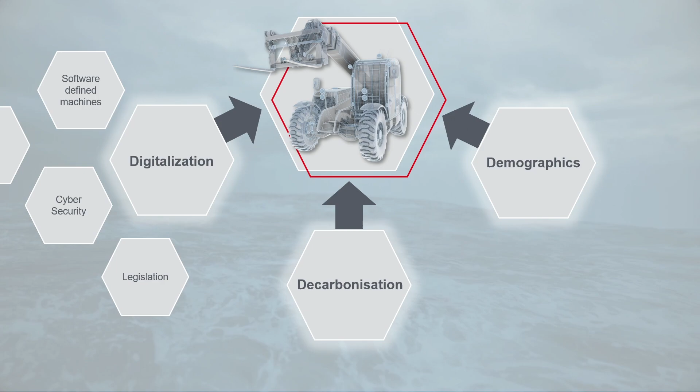Let's take a step back and look at the technical, ecological, and social trends that determine the requirements of your machines. We can identify 3 megatrends: digitalization, decarbonization, and demographics. A wide range of trends and challenges can be identified around these megatrends. A megatrend such as digitalization influences countless trends, from software-defined machines to legislation, generating new challenges.

One example is cybersecurity. The megatrend of decarbonization is obviously shaping technological change and represents a major transformation in the mobile machinery industry. Finally, the megatrend of demographic change, which is related to the development of new machines, and on the other hand, it's a motivation, for example, for mobile automation.

After this introduction, I want to start with the first topic of today, efficiency. I want to start with a question: Do you know the load spectrum of your machine? I know that's a difficult question because there are so many ways your machine can be used. There are so many influences, starting from the driver, and ending with the question of the working task of your machine. But if you can say yes, great, because that has laid the groundwork for my second question.

Do you know which losses occur in your machine? We will see later where these questions bring us.

I want to start with the multi-level approach for energy-efficient hydraulics. On the first level, the component and design level, we have different solutions, for example, parts-in-body solutions, flow-optimized cartridge valves, and pumps with high efficiency. This solution will help to improve the efficiency, but it will not help you to systematically prevent losses in your machine.

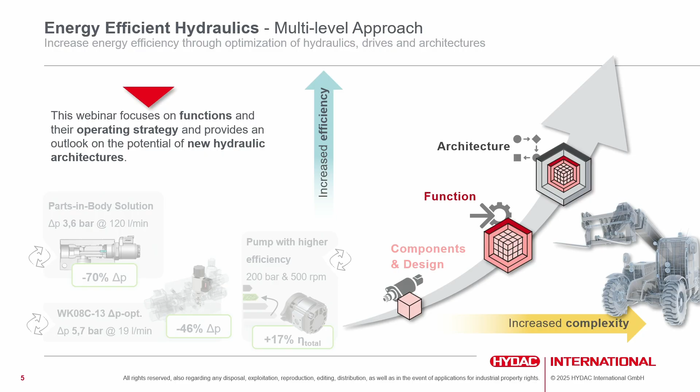Systematic avoidance of losses can be achieved at the functional or system architecture level of your hydraulic system. The greatest potential can be found in new hydraulic architectures, but they also represent the biggest change in your machines and go hand in hand with an increased complexity of your machine. This webinar focuses on functions and the operating strategy and gives an outlook to new hydraulic architectures.

Mobile working machines are characterized by a wide range of load collectives, depending on the machine, its application, and even the driver. Here are a few examples: on the one hand, the crawler excavator, which is more or less a stationary application; and on the other hand, the dumper, which is a driving machine with a high time share of driving and low time share of working hydraulic functions. In between, applications like the wheel loader or the telehandler.

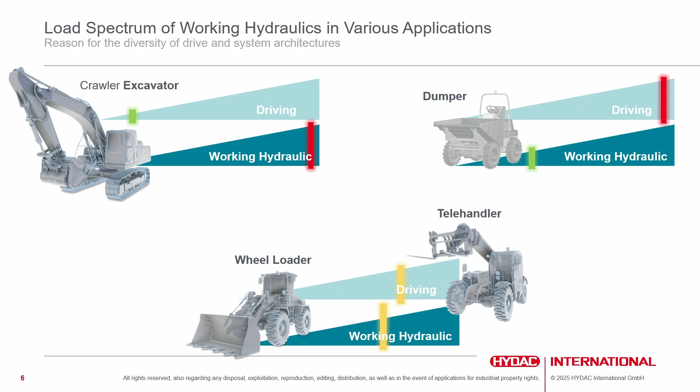Looking at the machines and their use, one might get the idea that both have comparable load spectrums. However, if we look a little bit deeper in the literature, we can find load spectrums for the working hydraulic function of these machines. And now you can see that the working hydraulic, or the load spectrum for the working hydraulic, looks totally different.

One example is the standby operation, which is much higher for the telehandler than for the wheel loader. The difference is also clear in terms of time share in the peak power and nominal power. This shows that the telehandler is used as a transport machine, while the wheel loader is used more for a rehandling operation on a construction site.

The conclusion of this slide is that there is no one-size-fits-all solution.

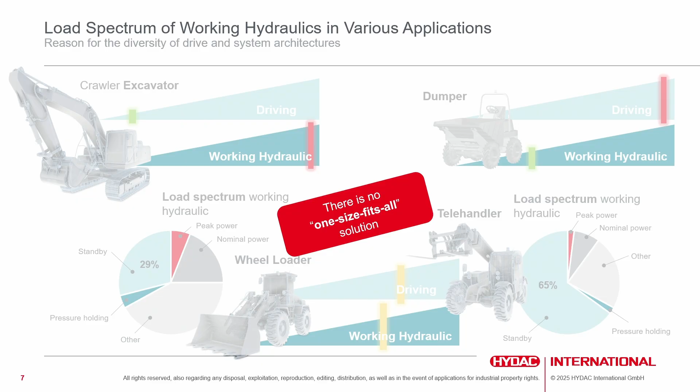Now we get a little bit deeper into the hydraulic system and try to understand which losses occur in your system. But we start with the good news for you: if you are thinking about electrification and replacing the combustion engine, you will increase the efficiency of your machine due to the bad efficiency of a combustion engine, which is equal to or lower than 40%.

On the other hand, the electric drive has an efficiency of 90% at a wide working range. So is this the answer to the question of how we can increase the efficiency of our machine? That's it? In my opinion, no - there's still a need for further energy savings on your machine to do the same job as before.

That brings us to the question: where do the losses in the hydraulic system occur? The following exemplary qualitative illustration of a Sankey diagram helps to explain this.

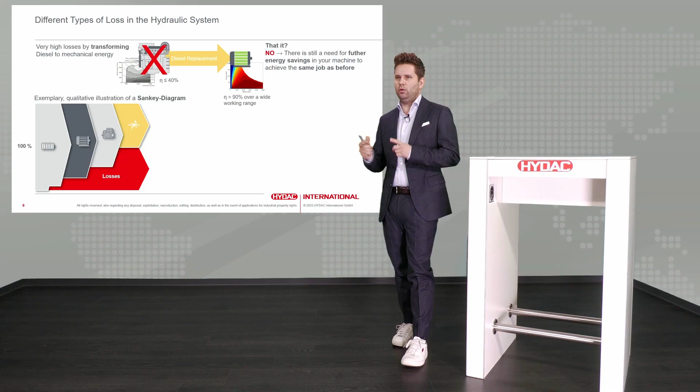The input energy, the 100%, is shown on the far left. At the end, the hydraulic output power of the main control valve, short MCV, is the power required for the job. This power is independent of efficiency and depends only on the machine and its working task.

Between output power and input power, there are losses: throttling losses, and transforming losses, which occur by transforming electric power into hydraulic power. Throttling losses depend on operation strategy, load collective, parallel movements of different hydraulic consumers, pilot oil supply, etc. Transforming losses depend on operation strategy of the electrohydraulic supply unit, the load collective of your machine as well, and the efficiency of the different components, meaning pumps, motors, inverters and so on.

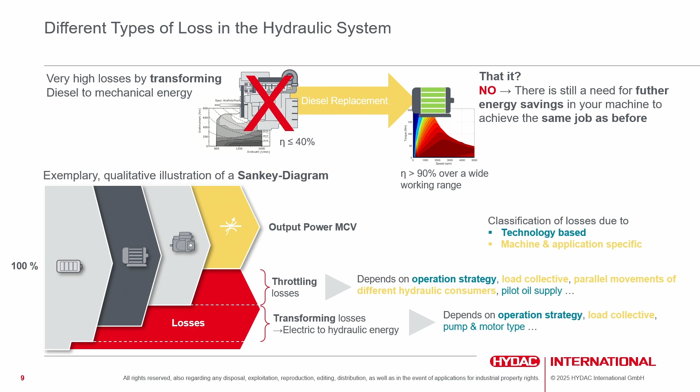Some of these can be influenced by technology, for example the operation strategy. You choose an operation strategy for your machine, for example a constant flow system or a flow on demand system. Some are machine and application specific and depend on the load spectrum. For example, do you have parallel movements in your machine? It really depends on which machine is doing which job.

For me, the key to increasing efficiency in your hydraulic system is always to avoid throttling losses. There are two types of throttling losses. The first: throttling losses due to the pump delivering too much flow, meaning more flow than the hydraulic actuators or different functions of your machine need. Second: throttling losses due to parallel movement of different functions in a single pump system.

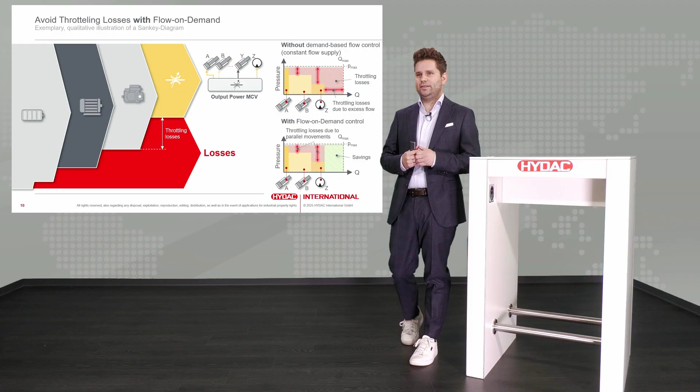Flow on demand is the first step to reduce throttling losses in your system, specifically the first type of throttling losses due to the operation strategy of your machine.

These diagrams show the efficiency of a constant flow system. These efficiency maps take into account the efficiency of inverter, motor, pump, and so on. So it's really related to input electric energy on the DC bus and the output power which is used at the MCV. The red area is the area of high efficiency and the blue area is the area of low efficiency. We compare a constant flow system and a flow on demand system with a state-of-the-art load sensing pump.

But first we look at the constant flow system. It's a fixed displacement pump at a fixed speed, meaning the flow is independent of the flow demand—the pump always delivers the same amount of flow. On the other hand, we can see the variable displacement pump. The input speed of the pump is also constant, and we are changing the output flow of the pump by changing the swivel angle of the pump. That means the pump only delivers the amount of flow which is needed by the different functions of your machine.

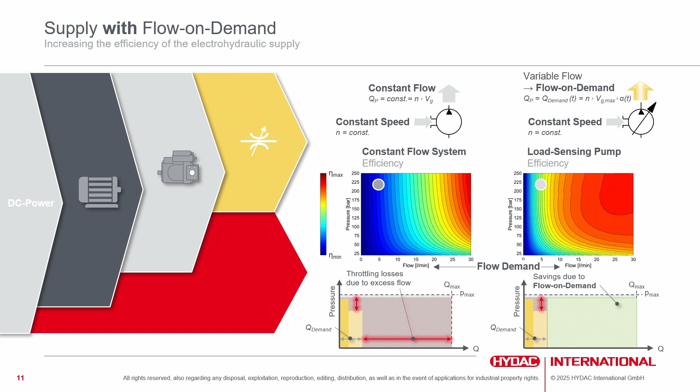On the right side, for the variable displacement pump, we can see that we are saving a lot of energy due to the fact that we are having a flow on demand system. That means only the flow which is needed is delivered by the pump.

One key to increase the efficiency of your electrohydraulic supply in your electrified machine is flow on demand. But that's not new information to you, because variable displacement pumps are state-of-the-art.

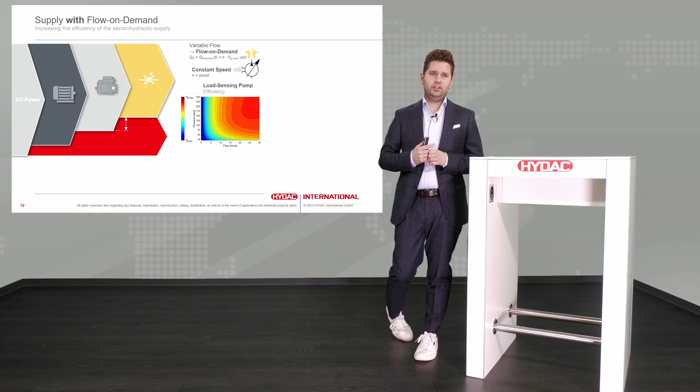One sentence on the throttling losses which occur in the system. We have a single pump supply for different functions, and if you operate, in this case, 3 different functions at the same time at different pressure levels, we also have throttling losses due to the fact that we have just one pump system.

In electrified machines, we have a new degree of freedom. The speed variable drive enables new solutions to increase efficiency and reduce noise. So, with the speed variable drive, we are able to build a flow on demand system with a fixed displacement pump.

How do we do this? We change the speed of the pump depending on the flow demand. That means if there is a high flow demand, we increase the speed. If there is a low flow demand, we decrease the speed.

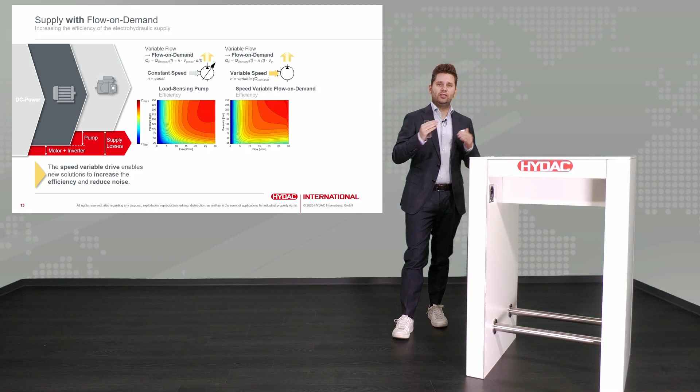You can see the efficiency map of a flow on demand system with a speed variable flow on demand system compared with a load sensing pump at constant speed. You can see that we are reaching the same high efficiency or even higher. For example, for increased efficiency, we can see it at moderate flow demand. We increase the efficiency of the electrohydraulic supply.

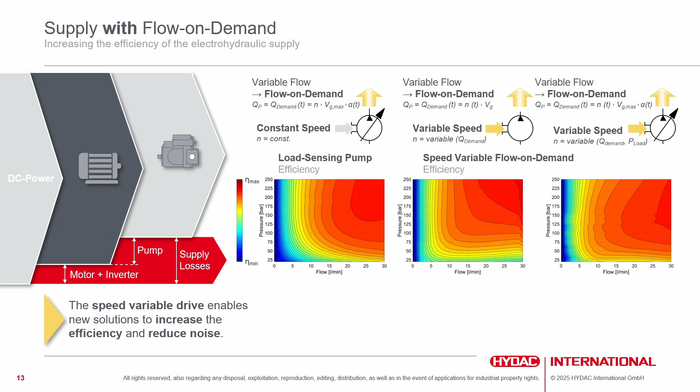But there's a second solution. Now we can use both degrees of freedom, the speed and the swivel angle of the pump. That means dependent on the flow demand and the pressure, we are able to swivel out the pump and increase the speed at the same time.

We can see the effect on the efficiency map. We increase the efficiency, especially at low flow demand and moderate flow demand, and we increase the areas of high efficiency.

In the HYDAC world, we call our product which enables the speed variable flow on demand system HYDAC EcoPack Plus. The HYDAC EcoPack Plus is an enabler to use the advantages of the electric drive in an easy way.

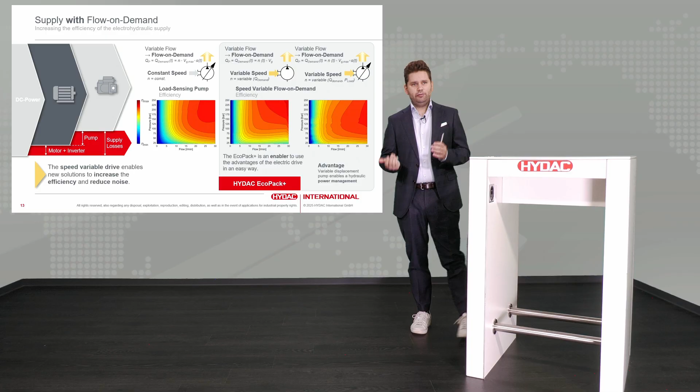For me, the biggest advantage for the speed variable displacement pump is that we are now able to realize hydraulic power management. That means with increased pressure on a fixed displacement pump, the torque also increases. In fact, the speed variable drive of the electric machine is limited by torque.

With the variable displacement pump, we are able to limit the torque by swiveling back at higher pressure and increasing the speed at the same time to deliver the same amount of flow which is needed at this point.

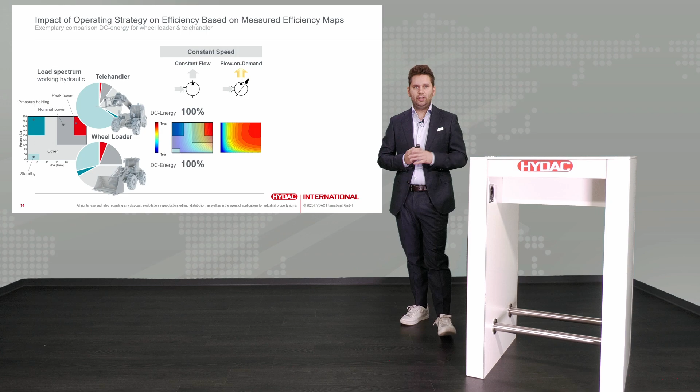Now we are looking at the flow on demand system with variable displacement pump. Also using the efficiency map that you already know, we put the load collective on it. And now you can see that the energy consumption of your electrohydraulic supply decreased drastically. Now you don't need 100% energy, just 42% for the telehandler and 54% for the wheel loader.

That means you have increased the efficiency of the flow on demand system drastically. And on the other hand, you avoid throttling losses. Between 100% and 42% are only throttling losses due to the supply strategy, the operating strategy.

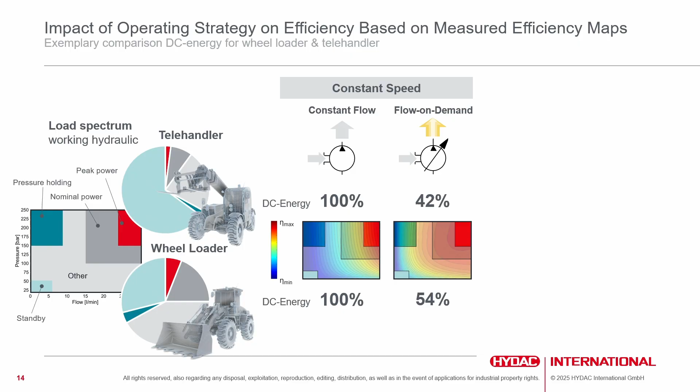Now we came to the point that we will optimize the operation strategy with the speed variable drive, using our two solutions for a fixed displacement pump and for a variable displacement pump, and also of course with the degree of freedom of speed variability.

We can decrease the energy consumption for the telehandler. That means for the speed variable drive, we just need 37% of the energy instead of 100%. And for the wheel loader, we can optimize the system by about 2%.

We will later see which effect we can see on the noise level.

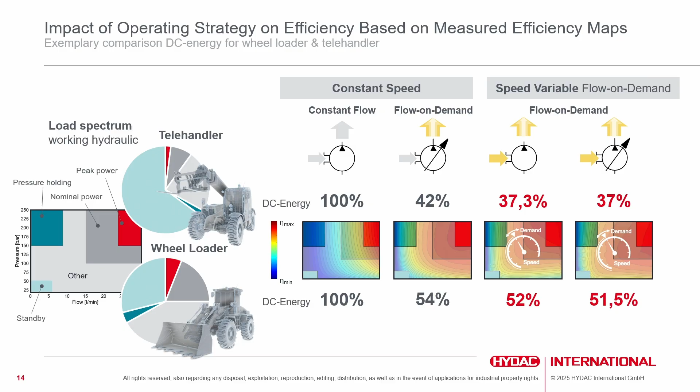Just a brief explanation of the HYDAC EcoPack Plus. The idea behind it is a pre-validated system that our customers can use to take advantage of electric drive in an easy way. The EcoPack Plus is a pre-developed system. More on this later in this webinar.

Due to the fact that we have a lot of different machines out there, remember there's not one fits all solution. We can realize various configuration possibilities with the EcoPack Plus, starting with a single pump, a double pump for optimized standby, or on the other hand, a double pump to downsize the electric drive. And of course, what I showed on the last slide, the variable displacement pump in combination with speed variable drive, which enables using the speed and the displacement of the pump as a degree of freedom to increase or optimize efficiency and noise. These different configurations make it possible to respond to the specific requirements of different machines.

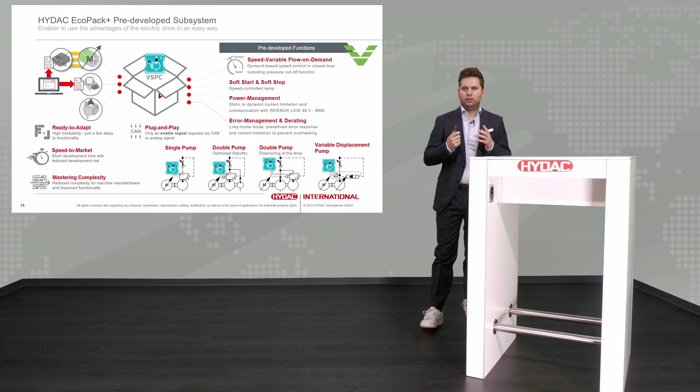Now we are moving forward to another important aspect in the system architecture. We have now discussed the advantages of flow on demand. What we have not addressed is the general system architecture.

Flow on demand in a closed center load sensing system is state of the art, of course. One example to realize the closed center load sensing is our LX3 or LX6 family of pre-compensated load sensing valves. The advantage of the load sensing system is the demand feedback due to the load sensing signal and the good controllability for the machine operator. The good controllability is achieved by two characteristics of these valves: the flow depends only on valve actuation, and the flow is independent of pressure due to the different compensator inside the load sensing valve.

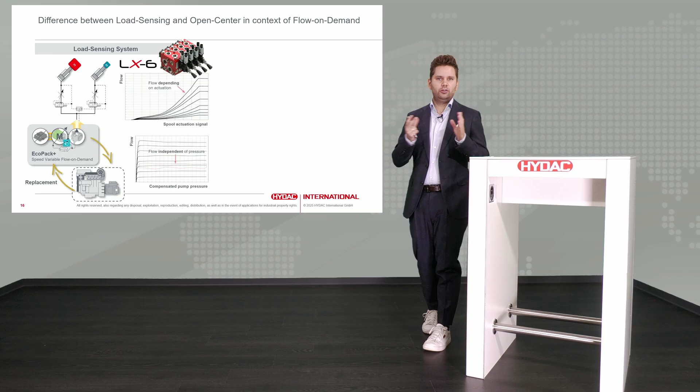Another advantage is the interchangeability between the electric drive, featuring the speed variable flow on demand system, for example, and the traditional combustion engine with a load sensing pump. This allows electric and conventional machines to share the same platform.

On the other hand, we still have many machines, especially in the compact range, with an open center system. The main difference in context of flow on demand for an open center system is there's no flow demand feedback, and of course, the pressure build-up depends on the center flow. The key word here is controllability, which makes it difficult for the machine operator to control and regulate the flow.

I would like to briefly explain the last point in more detail. The illustration depicts a schematic of an open center hydraulic system. We have a center metering orifice and a metering orifice for the function. As the spool actuation increases, the inlet metering orifice opens, allowing more flow to the function, while the center metering orifice restricts the flow through the center path, causing a pressure buildup until the load pressure is reached in the center and the check valve opens and the cylinder movement starts.

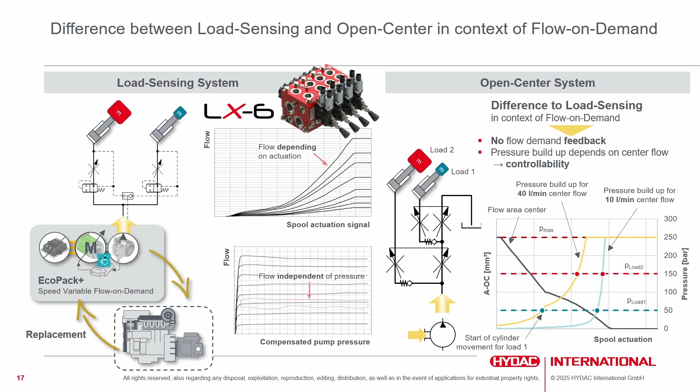That's the reason why we also call the open center system load sensitive. We have asked ourselves, can we get an open center system ready for flow on demand? And the answer is yes.

Therefore, we developed a special spool which enabled us to decrease the center flow and also have good controllability for the operator. We will see this on the next slide.

Second solution, what we did is we developed a negative flow control plug, NFC plug, and these plugs give us a demand feedback which enables us to realize a flow on demand system, for example with the HYDAC EcoPack Plus. Now, what I mentioned before, two diagrams, I will briefly explain it.

In the first diagram, we see the pressure in the center over the spool actuation. For a standard spool, that's the gray one, and the yellow one is the negative flow control spool, which is optimized for a lower center flow to realize a flow on demand system. What we are seeing for the NFC spool is that we have a nice pressure buildup over spool actuation, instead of the standard spool.

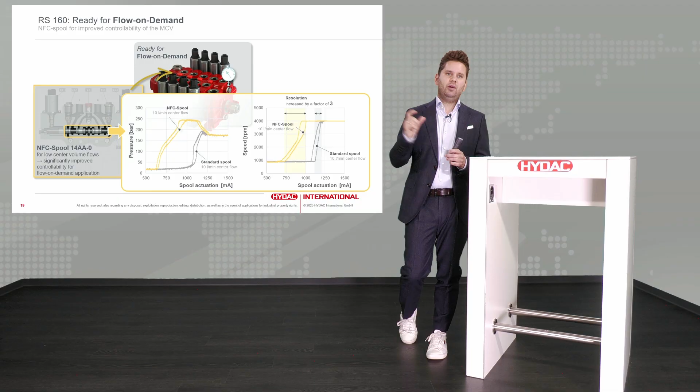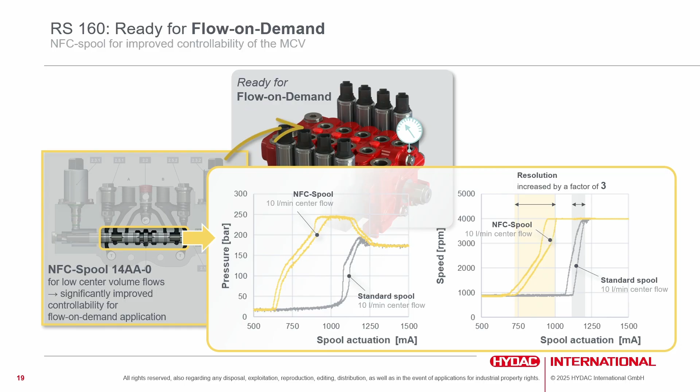Another way to reduce throttling losses, especially in compact machines, is the HYDAC Eco switch. For cost reasons, some machines are electrified but still using the hydrostatic drive. The speed of the drive is determined either by the driver or by the hydrostatic drive. Accordingly, there is no degree of freedom for the variable speed flow on demand with constant pump.

With the Eco switch, we offer a solution for small machines without electronics, sensors and software. It works with open center system, closed center system, and of course closed center load sensing system. The idea of the Eco switch is to use a double pump instead of a single pump for the working hydraulic functions that we can see here on the slide. Instead of one single pump to supply the working hydraulic functions, we're using two pumps.

One pump we are able to switch into low pressure bypass at low flow demand. We measure the flow demand of the system with the HYDAC Eco switch control block. That means the control block is able to measure the flow demand, and in high flow demand we switch the second pump to the system, and in low flow demand we switch the second pump stage into low pressure bypass.

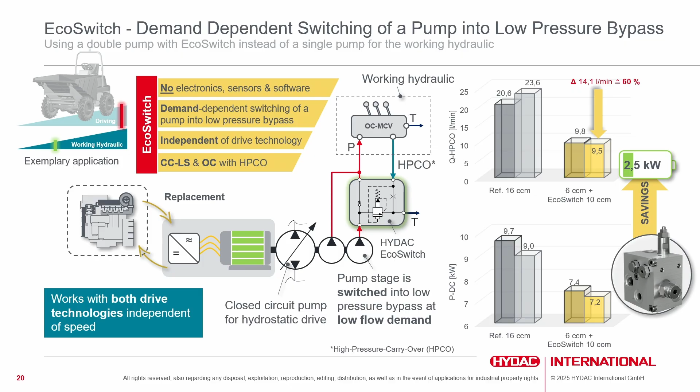So for small machines and also for bigger machines, for example for the auxiliary drives, this is a solution. On the other hand, it works with both drive technologies. That means, because it's independent of the speed variability of the electric drive, you can also use it with traditional combustion engine or of course with the electric drive.

We have now discussed the advantages of flow on demand and how we can avoid throttling losses due to the fact that the pump delivers too much flow.

Avoiding throttling losses caused by parallel movements of different functions requires a more fundamental change at the hydraulic architecture level.

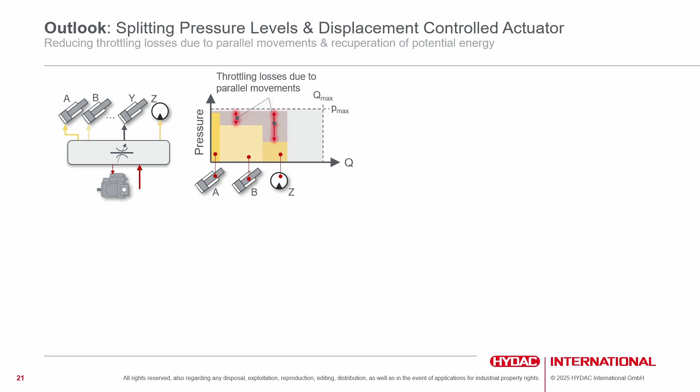One possible solution is pressure level splitting achieved by using two independent hydraulic circuits. You know very well which functions are operated at the same time, and you know the pressure level. So, for example, function A and B have more or less the same pressure. We put them in one hydraulic circuit, and we have a second hydraulic circuit for the third function, for example, in this case, a hydraulic motor. Because now we have two independent hydraulic circuits, we are able to avoid throttling losses between the pressure level of A and B and the third function.

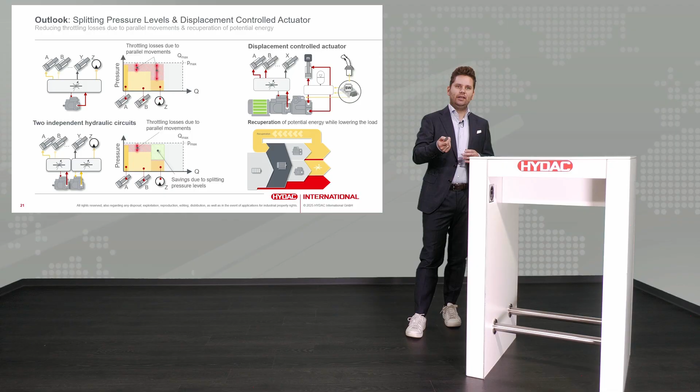On the other hand, we have in mind a displacement controlled actuator. That means in some machines we have the possibility to recuperate energy by lowering some loads. So we have two hydraulic circuits: one is more or less traditional, and a second hydraulic circuit with a displacement controlled actuator. Now we are able, on one hand, to avoid throttling losses between the functions, and during lowering the load we can get the energy back and recuperate energy. That means over the whole cycle of the machine, the input energy will decrease.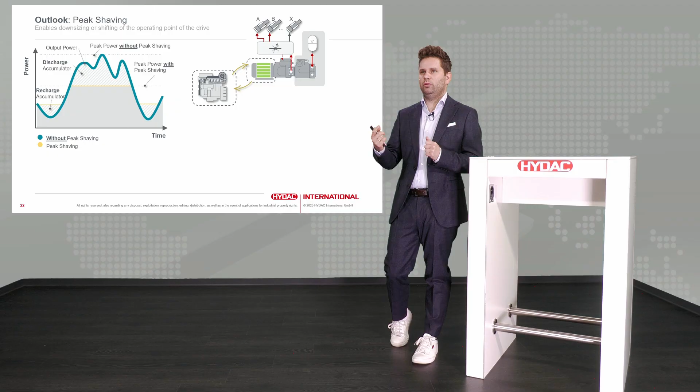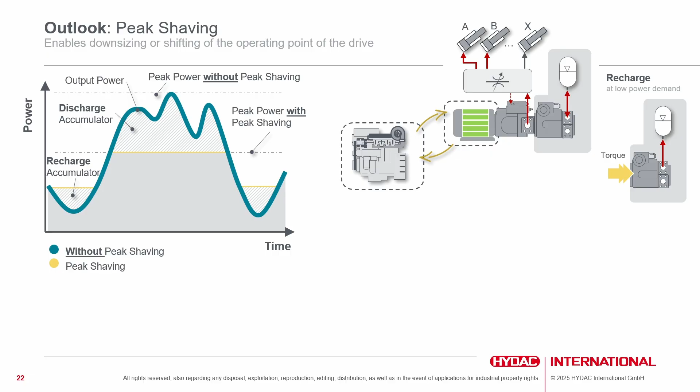In this diagram, the output power is shown over time, and we have time periods with high power demand and time periods with low power demand. The idea is now, in time periods of low power demand, we are recharging an accumulator and using this energy in high power demand time periods, discharging the accumulator. That means we are decreasing the peak power of our drive because we are cutting the peaks.

Benefits are downsizing of motor and inverter, which also brings down cost and weight. We can gain some efficiency advantages by shifting the operation point, for example on the combustion engine, and of course reduce peak loads, which decreases the load stress on the components as well.

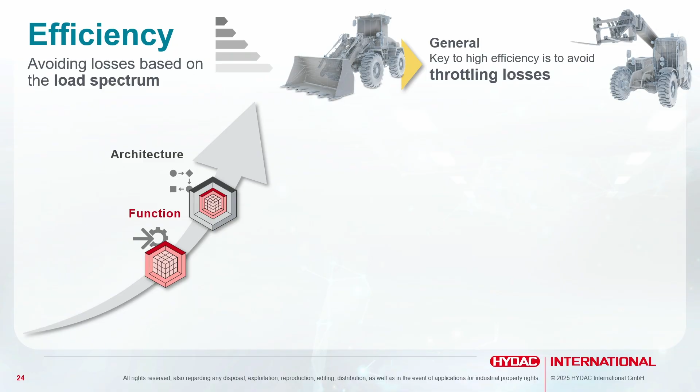Before we move on to the next section, let's briefly summarize the key insights discussed so far. In general, the key to high efficiency is to avoid throttling losses. I have shown you different solutions: on one hand, the hydraulic-electric switch for smaller machines, but also some solutions on a function level to optimize the electric hydraulic supply unit, because the speed variable drive enables new solutions to increase efficiency on one hand and reduce noise on the other. This is what I capture under the heading of speed variable operation strategy.

If we want to further increase the efficiency of our machines, I'll give an outlook about different changes in the machine which affect the architecture level. One example is peak shaving, or two hydraulic circuits, or the possibility to recuperate energy.

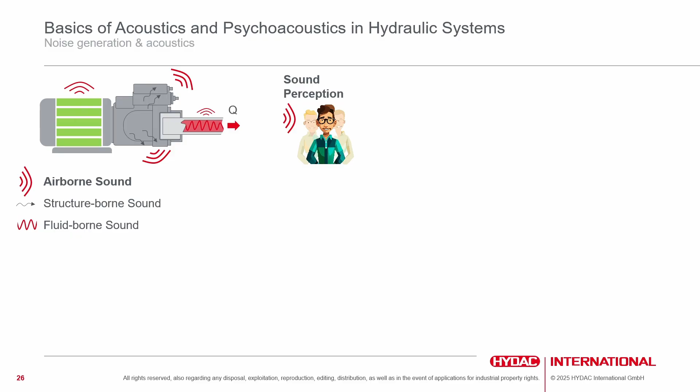The wave propagation causes a pressure fluctuation around the static ambient pressure. The human hearing is able to perceive pressure fluctuation in a range between 20 micropascal and 200 pascal, in a frequency range between 20 Hz and 20 kHz.

The sound pressure level is calculated according to the shown equation from the effective sound pressure in relation to a reference sound pressure P0. For airborne sound, the reference is 20 micropascal, equivalent to the human hearing threshold. The sound pressure level is expressed in decibel.

This diagram shows the equal loudness curves, also called isophones, and illustrates the frequency-dependent perception of a sound, showing how our hearing varies across the frequency spectrum. The perceived loudness remains equal along a curve. What you can see is that at low frequencies, the sound pressure level needed for the same loudness perception increases.

The A weighting of the sound pressure level already takes this into account. That means at lower frequency, the sound pressure level is weighted lower than at higher frequencies. You can see this here.

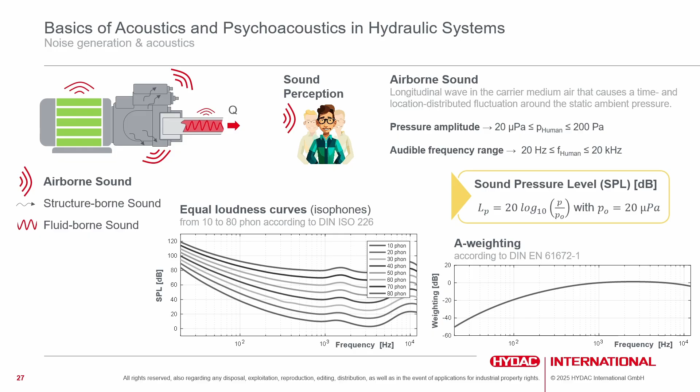Why do we need new metrics such as loudness or sharpness? Psychoacoustics and its metrics are not new. Psychoacoustics has been used for a long time in the automotive industry or for consumer goods. However, its application to hydraulic components and systems has been quite uncommon up to date.

As part of my research at the Institute, I was able to gain my first experience in this field. For me, the biggest advantage is, on the one hand, that psychoacoustic metrics are allocated to perceptions, for example loudness. Loudness corresponds to the perceived loudness of a sound.

The loudness calculation considers the sound pressure level, the frequency of the sound, and also masking effects. Sharpness corresponds to the perception of high-frequency sound components. And there are many more, for example roughness, but for today we want to focus on loudness.

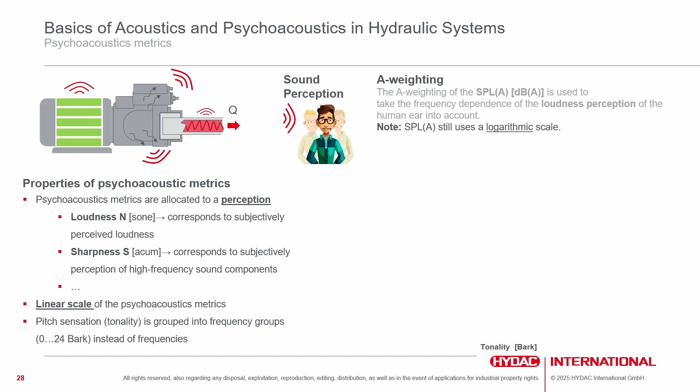On the other hand, psychoacoustic metrics have a linear scale, which is a big advantage. That means a noise with a loudness of 10 sone is twice as loud as a noise with 5 sone, but only half as loud as a noise with a loudness of 20 sone.

I would like to explain this with an example from literature. These graphs show the distribution of sound pressure level for an internal gear pump, an axial piston pump, and a sound of 1 kHz. These three sounds have the same sound pressure level. One note at this point: the internal gear pump and the axial piston pump have different operating points. It's not important to understand these graphs in detail, but it's important to keep that in mind.

Now we are calculating the specific loudness for these three different sounds. The second diagram shows the specific loudness over the tonality, which is linked to the frequency of the sound. We can also see how the loudness is calculated from the specific loudness: the loudness is the area under these curves.

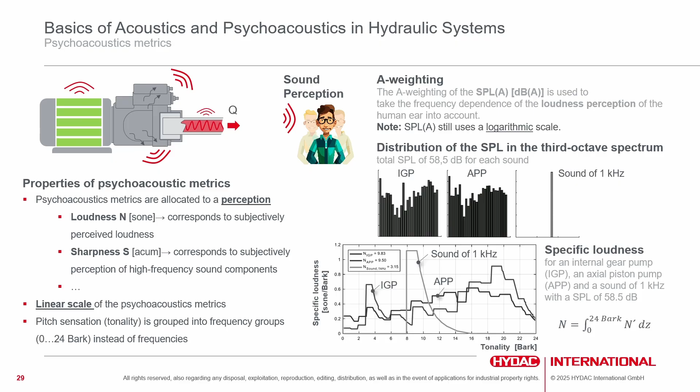What we now see is that the sound of 1 kHz has a lower loudness than, for example, the internal gear pump and the axial piston pump, and there's a factor of 3 between them. That means the perceived loudness of the pumps is 3 times higher than that of the synthetic sound, even though all have the same sound pressure level.

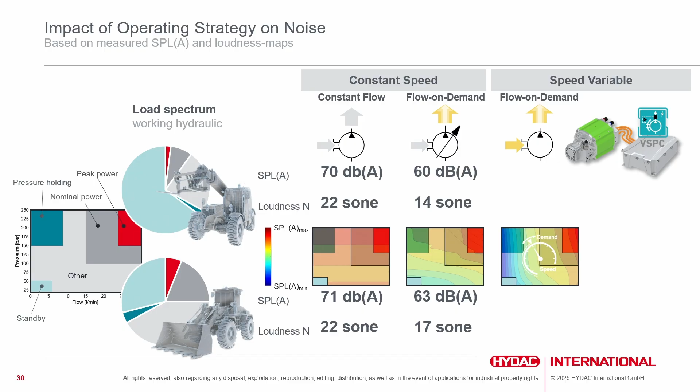For the variable displacement pump, we decrease the sound pressure level by 10 dBA and decrease the loudness to 14 sone. With our speed variable flow-on-demand system, we are able to optimize the efficiency on the one hand, and on the other hand, we are decreasing the noise.

That means we can calculate a sound pressure level of 54 dBA for the telehandler, and for the wheel loader, due to the higher nominal and peak power operation points in the load spectrum, the sound pressure level is a little bit higher than for the telehandler. We can calculate at 59 dBA.

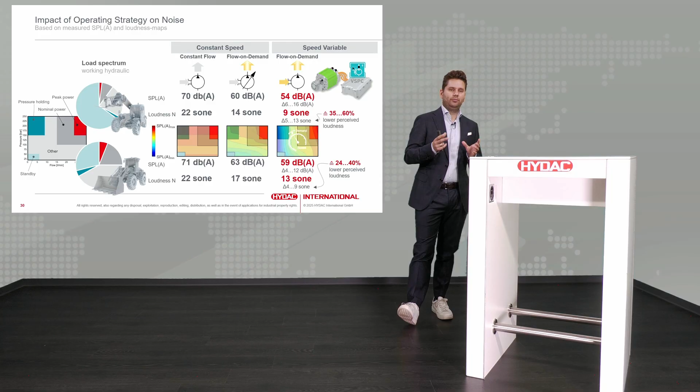But on the other hand, this is really interesting. We can achieve for the telehandler a loudness of 9 sone. That means, in fact, that we decrease the perceived loudness 35% up to 60% for the telehandler. And for the wheel loader, we lower the perceived loudness from 24 up to 40%.

That's a lot. Because I'm often asked what influence a pump has on the noise, I would like to briefly discuss the following diagram. Above, we show the A-weighted sound pressure level as well as the loudness over speed for 2 different pumps, a silent pump and a super silent pump, at a constant load pressure of 200 bar.

Now we can see that the sound pressure level increases drastically with speed. It's the same for the silent and also for the super silent pump. At 500 RPM, the difference is about 15 dBA. But how does this affect the perception?

The difference in loudness is about factor 2. That means this difference is factor 2. That means the super silent pump is half as loud as the silent pump.

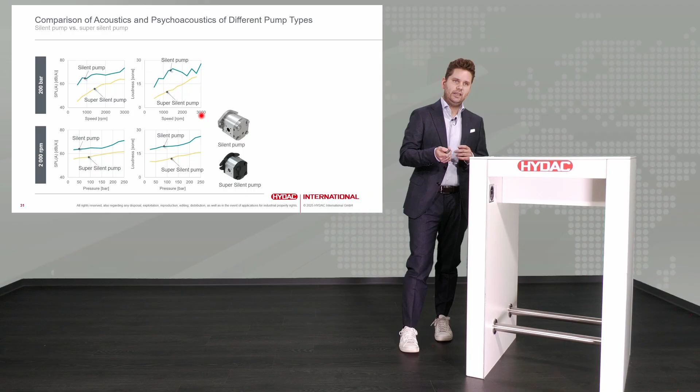On these diagrams, I show for a constant speed the sound pressure level and the loudness over an increasing pressure. And what I want to show you is that the gradient of the sound pressure level and the loudness is higher on the diagram above.

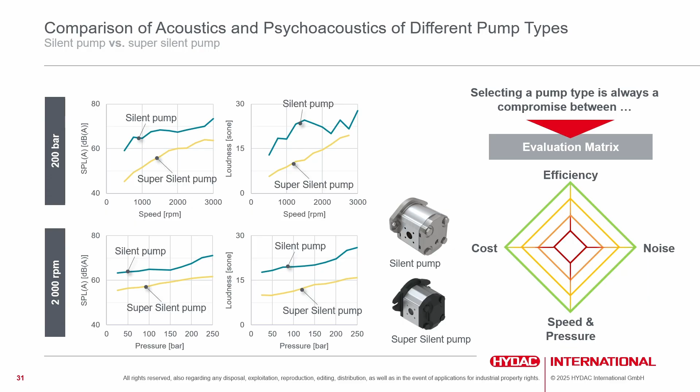That means the speed has a higher influence on the noise of the pump than the pressure. We saw this clearly on the last slide. At the end, selection of a pump is always a compromise between efficiency, noise and cost, but also taking into account, for example, speed and pressure limits and so on.

Another way to reduce noise in the system is a HYDAC silencer. We remember fluid-borne noise can propagate through other hydraulic components, and this leads to airborne noise at locations outside of the pump. The HYDAC silencer helps to reduce pressure pulsation caused by the pump.

Therefore, we are using a HYDAC Multiple Helmholtz resonator concept, with one resonant volume with multiple necks for broadband performance. You can see that the pressure fluctuation on the inside is higher than on the outside.

This reduced pulsation or pressure pulsation emitted by the displacement unit is a source of noise. That means with reduction of this pressure fluctuation, we are reducing the noise emission in the hydraulic system. The big advantages of the HYDAC silencer are there's no installation of moving parts, no gas cushion, and no maintenance.

We have universal standard silencers or customized solutions. I have an example today for a machine. It's a telehandler, to be honest, with silencer and without silencer.

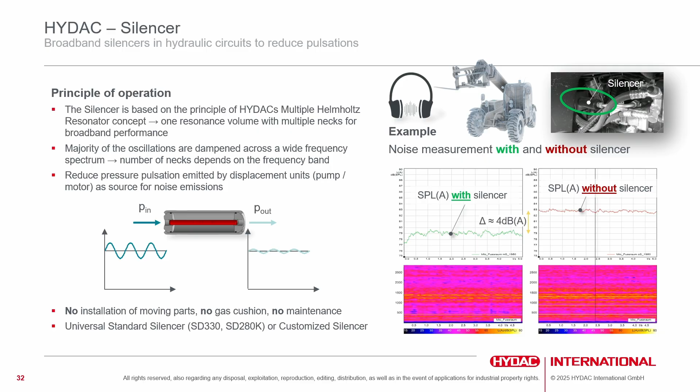The difference between both is about 4 dBA. But the bigger difference we can see in the frequency spectrum. You can see that the pressure amplitudes are reduced at a certain frequency.

At this point, I'd like to highlight the key takeaways up to now. Loudness allows a direct conclusion to be made on human hearing perception. And I show how the speed variable operation strategy of an electrohydraulic supply can reduce the perceived loudness on your machine up to 60%.

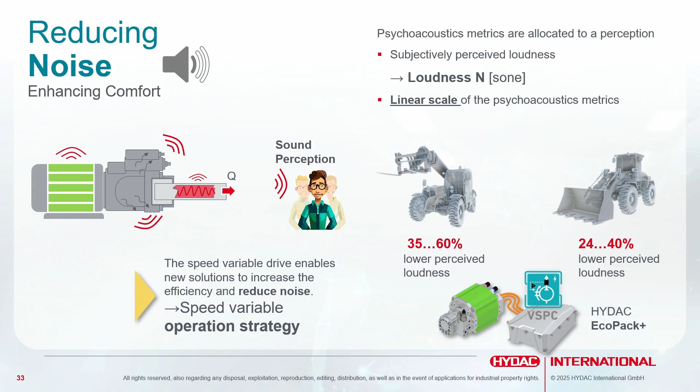Now we came to the topic of mastering complexity in a world of technological change. Let me start with a video.

20 years ago, a video was released that has become a timeless classic. The video shows Steve Ballmer, former CEO of Microsoft, in the early 2000s. He's talking about the key to industry transformation, and his key to success was developers. The question to you is, is this statement still relevant?

But now let's just look into the video.

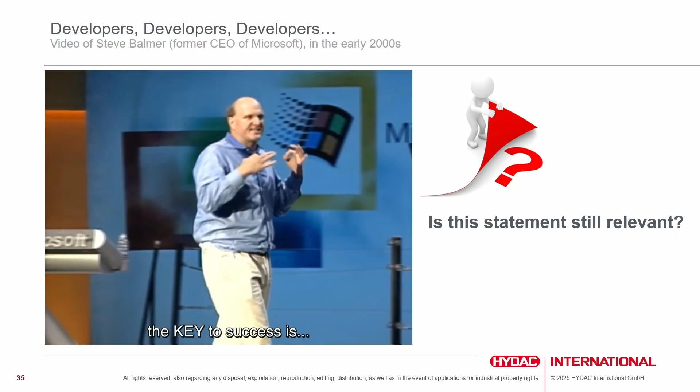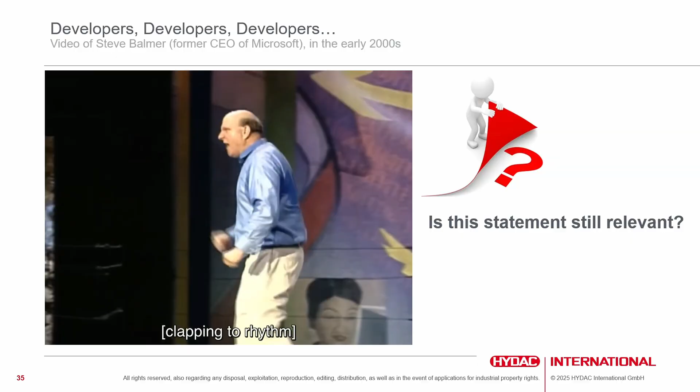The key to .NET, the key to industry transformation, the key to success is developers, developers, developers, developers, developers, developers. Developers, developers, developers, developers, developers, developers, developers, developers. Yes!

Developers, developers, developers. What do you think? Is this statement still relevant? Again, this question.

But now I want to briefly explain the Kano model. The Kano model is a framework used to focus on customer needs by categorizing different product features based on how they affect customer satisfaction. It divides features into three categories: basic attributes, performance attributes, and excited attributes.

Basic attributes are must-have features for your machine. If these features are missing, customers are dissatisfied, but having them doesn't increase satisfaction. Performance attributes,

the more of these features your machine has, the better. Satisfaction increases linearly with performance. And last but not least, the excited attributes: unexpected features that surprise the customer. They create high satisfaction but are not missed if absent.

Over time, customer expectations shift. We all know this from our passenger cars. Today's excited attributes become tomorrow's performance attributes or even basic expectations. The Kano model helps track these changes to ensure products stay relevant and competitive.

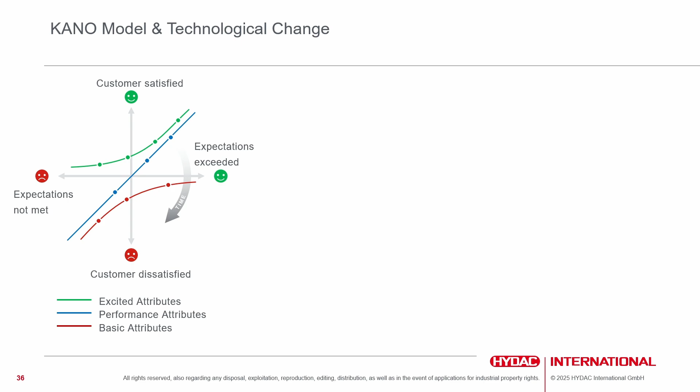How could a Kano model look for mobile machinery in the context of hydraulic features? A small note on this point: the model shown does not claim to be complete.

So let's just look into the excited attributes of yesterday. Maybe we can identify electrohydraulic pilot-operated main control valves. Today, these may be performance attributes, and tomorrow, they become basic attributes.

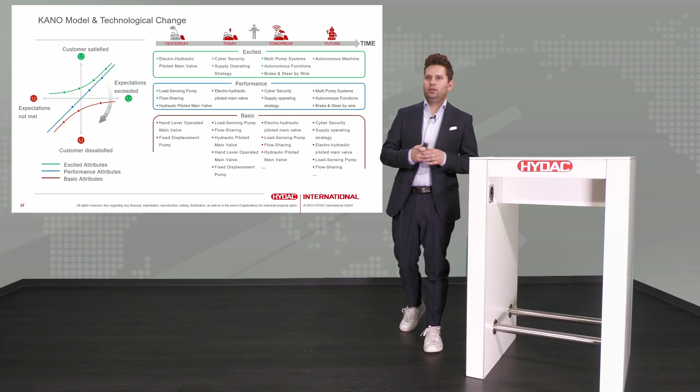Perhaps even more exciting than looking at machines of yesterday and today, it's looking at machines of the future. What do I expect to be exciting attributes in the near future? For example, multi-pump systems, autonomous systems and autonomous functions, or hydraulic systems that support autonomous functions, and brake-by-wire and steer-by-wire. And there are more. In the far future, hydraulic systems specially made to support autonomous machines.

To be honest, I don't know. What do you think? However, it has become obvious that machines, including hydraulic features, will continue to increasingly be defined by software, and the complexity of their functions will increase.

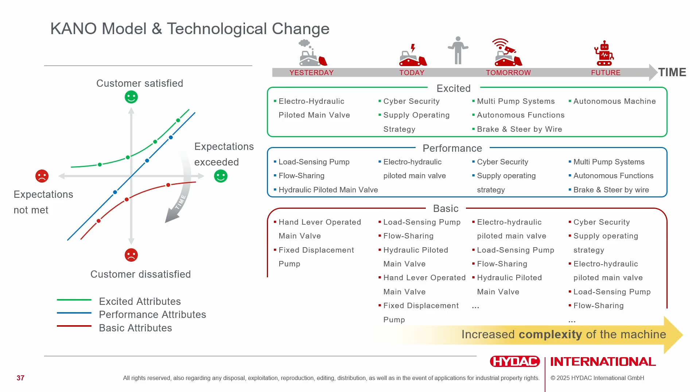Let's return to the topic of developers. You remember? The current situation in Germany looks like this: Germany has more people than ever before. It's unclear in which direction we will move in the future, and there are different models for this.

However, it's also a fact that in the next 12 years, approximately 13 million people will reach retirement age, and only a few can currently fill this gap. When looking at the situation for engineers, unfortunately, it becomes even worse. On the one hand, there's increasing demand due to experienced engineers retiring and new complex tasks emerging. On the other hand, fewer and fewer people are starting and successfully completing studies in science, technology, engineering, and mathematics subjects.

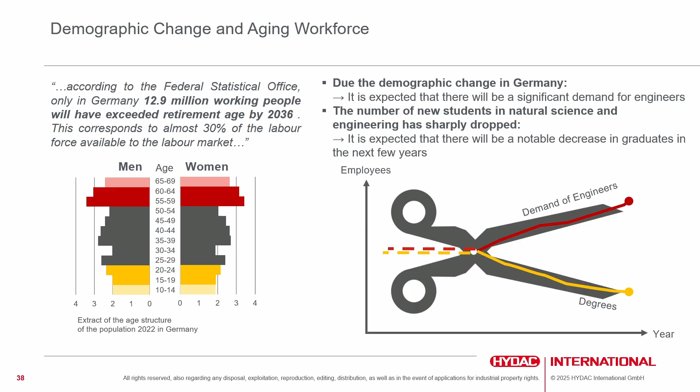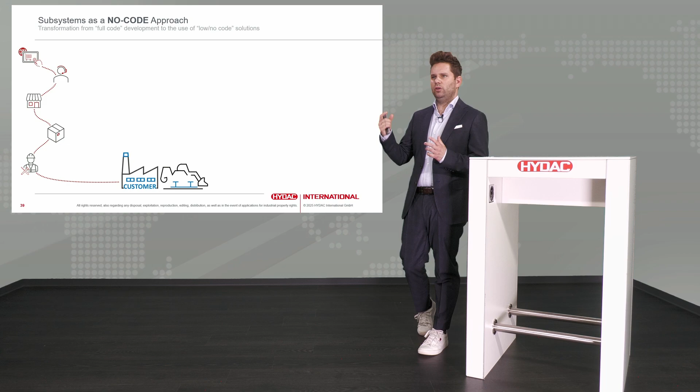What is our solution at HYDAC? Instead of developing everything from scratch, we want to use low-code or no-code solutions. We want to develop our machines quickly with a minimal number of developers. In terms of systems and software development, our goal is to use a modular approach with certified components.

One approach is to use topic-specific subsystems or software libraries. We call them toolboxes. I'm often asked what a subsystem is and what can be imagined under it.

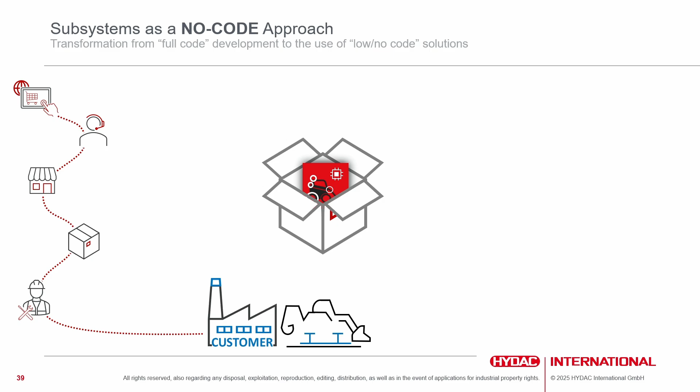Here's a graphical illustration. You purchase a topic-specific subsystem, for example, a steering system. You receive a package with sensors, control unit, with pre-installed software, actuators, and so on. This subsystem is designed for a specific machine function and can be integrated into your machine.

The entire product is certified, ready for integration. It contains the complete functionality and can be configured via a service tool. In this context, when you have a control unit that you don't need to program, you only have to adjust parameters. That's what we call a no-code solution.

Here's a possible landscape of HYDAC subsystems, toolboxes, and solutions. The overview covers a wide spectrum of what HYDAC can offer to you. While my background is hydraulic systems, I'm excited to share highlights from across our portfolio.

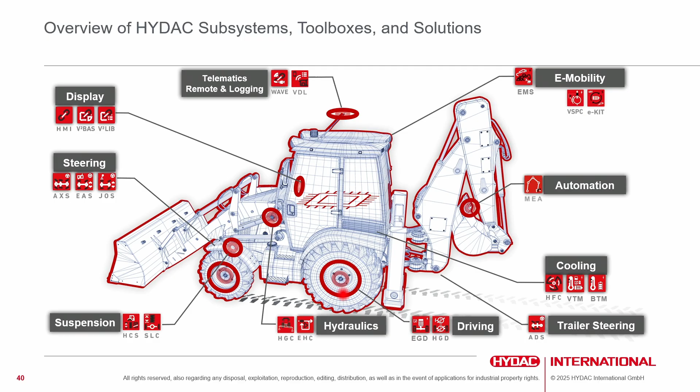We can find, of course, solutions for e-mobility like our e-kits. We have solutions for steering functions, also steering functions for trailers, for suspension systems, and so on.

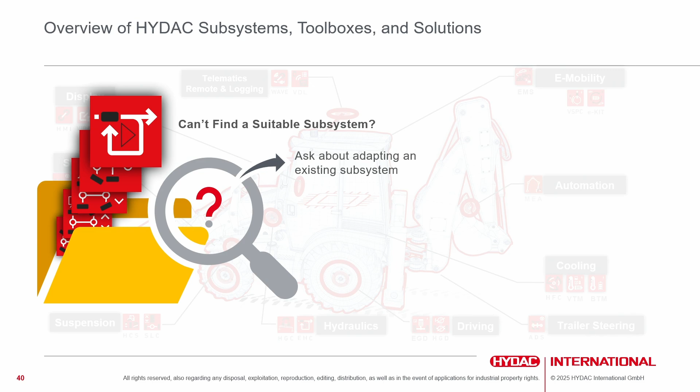Can't find your suitable subsystem? Ask about adaptation of an existing subsystem, or start a customized development project with pre-developed software solutions.

Today, I want to briefly highlight two subsystems from HYDAC: the application software VSPC, which stands for Variable Speed Pump Control, as part of the HYDAC EcoPack Plus, and the HYDAC Ground Control for field sprayer application.

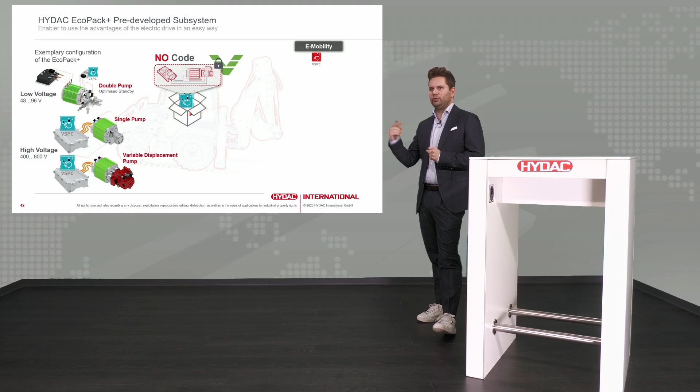We have already seen the advantages of the variable speed flow on demand in terms of efficiency and noise. I have also already mentioned the various configuration possibilities of the EcoPack Plus, which make it possible to respond to the specific requirements of different machines.

Here are 3 examples of different configuration possibilities for low voltage applications up to 96 volts, and on the other hand, high voltage applications up to 800 volts.

Again, the idea behind the EcoPack Plus as a pre-validated system is that our customer can use the advantages of the electric drive in an easy way. It only requires an enable signal to start.

To meet this requirement, we have implemented additional features on top of the speed variable flow on demand. For example, soft start and soft stop features, power management, and error management, such as a limp home mode and a derating function to prevent the drive from overheating.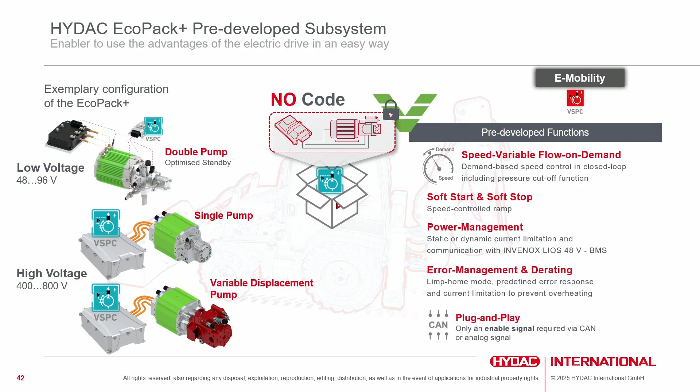Alongside the main function, speed variable flow on demand, the second subsystem approach I'd like to highlight here has nothing to do with electrification, to be honest. Nevertheless, I like to briefly mention it as it demonstrates the advantage of the no-code approach. A brief description of the function:

Field sprayers have a very long boom structure, you can see it in this picture here. The HYDAC Ground Control Plus controls the lift and the tilt axis, and of course angles the right and left structure.

The system includes the hydraulics, the sensors, and the control application software. In short, everything you need to implement this function on your machine.

The big advantage I want to highlight here is that we reduce complexity on one hand for the machine manufacturer, and we increase the speed to market. That's important in some machine areas to increase market share as well.

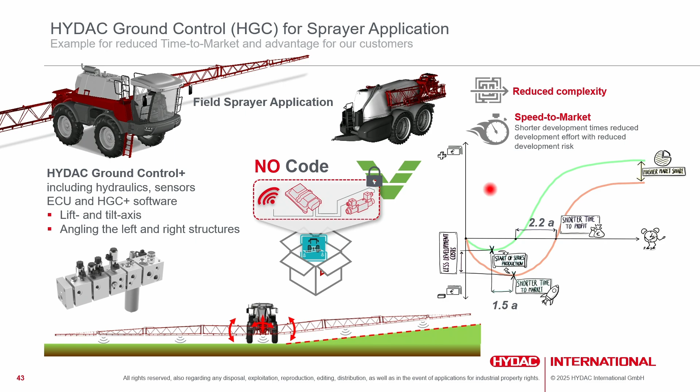So, with less development costs, you can see it here, you can get faster into a market, and at the end you create a higher market share.

Before we move on, let's quickly recap the key points so far. We start with developers, then we move on to the Kano model to explain why machines become more and more complex.

In this context, I presented the Kano model for mobile machinery, in the context of hydraulic features in the future. I expect that multi-pump systems, autonomous functions, brake-by-wire, and steer-by-wire will become exciting attributes in the near future. But the question is, what do you think?

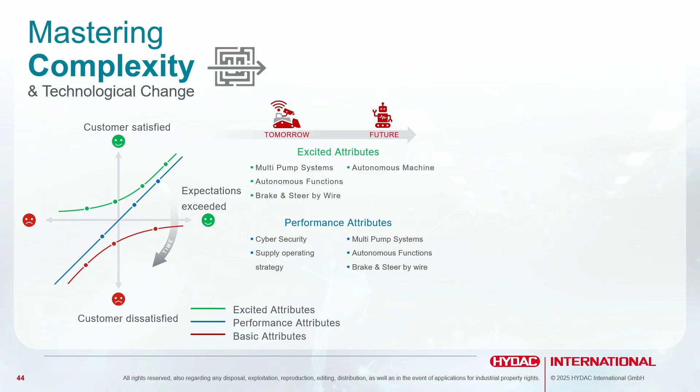Our approach to master complexity is to use topic-specific subsystems or software toolboxes. I showed you two examples of HYDAC subsystems, the EcoPack Plus and the HYDAC Ground Control Plus.

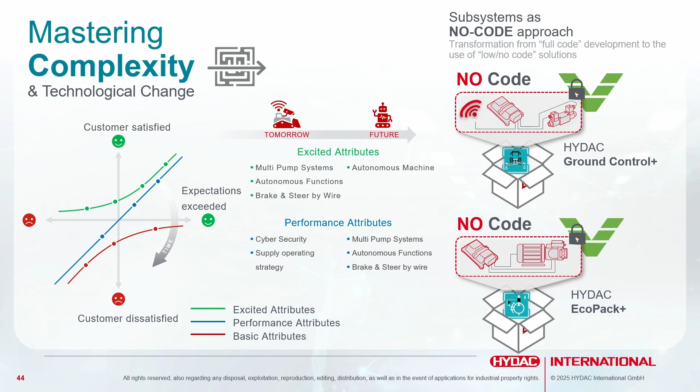Autonomous functions as an exciting attribute are a good crossover to our last topic: ready for automation. The topic of autonomous functions has been on our minds at HYDAC for quite some time.

Thanks to the interdisciplinary nature of this, the interplay of hydraulic, software and sensor technology in connection with different machines, it's a perfectly suitable playground for us at HYDAC.

In 2020, we launched a development project to answer the following questions: what is the best architecture of electronics, sensors and hydraulics to realize automation functions on a machine? Can I achieve an assisted working function with components that are used in ongoing production? And last but not least, what has to be changed from existing machines?

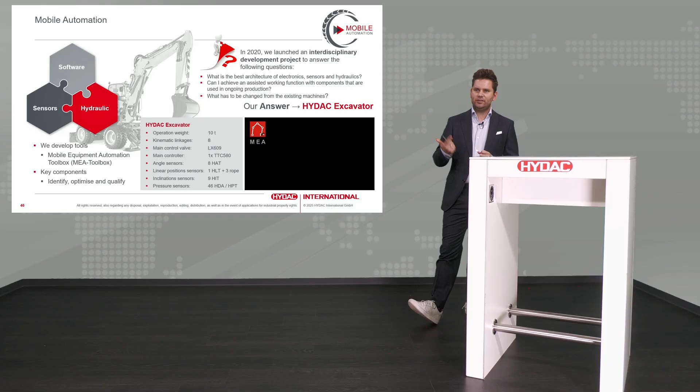Our answer is the HYDAC excavator. We have equipped this complete machine with HYDAC technology, starting with the main control valve, angle sensors, tilt sensors, position sensors, and almost 50 pressure sensors.

The large number of sensors can be explained by the fact that we want to compare the accuracy and the dynamics of the different sensor technologies.

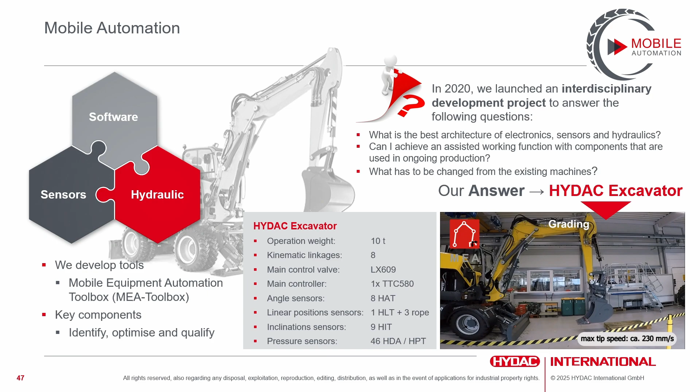The result? We developed software toolboxes - more on this on the next slide - and we also identified key components. Perhaps even more important, we understand the challenges related to mobile automation, because we had to overcome them ourselves. With this knowledge, we can support our customers.

As already mentioned, the interdisciplinary nature of this means the interplay of hydraulic, software and sensor technology in connection with different machines. We took this into account when developing our mobile equipment automation toolbox.

The core of the mobile equipment automation toolbox is an open kinematic chain, which enables us to use one approach for different machine kinematics. The kinematic chain calculates the necessary movement of different machine functions. In an excavator, for example, it's the movement of the boom, stick and bucket cylinder.

The kinematic calculates based on operation inputs. That means someone has to tell the machine which tasks to perform and, if necessary, how quickly the machine should perform it. And of course, the sensor inputs - I say it's the eye of the machine, which monitors the movement of the different machine functions, but more on the sensor technology later. The various actors are controlled as an output of the kinematics.

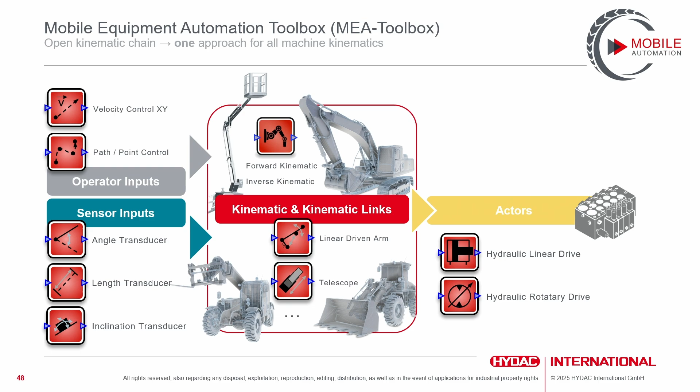This brings us to the electromechanical spool actuation of our LX3 and LX6 family with the ICU. The advantages of the ICU are the reduced number of necessary I/Os of the vehicle control unit, because now on the machine more and more sensors are needed to measure the movement of the machine. With the ICU, just one connector for the whole MCV is needed. That's also an advantage because it simplifies the cable harness on your machine.

The ICU also can increase the efficiency of your system because with the electromechanical spool actuation, we can get rid of the pilot oil and also the pilot oil supply. The ICU enables valve diagnostic and error detection due to CAN communications, and this enables enhanced safety concepts.

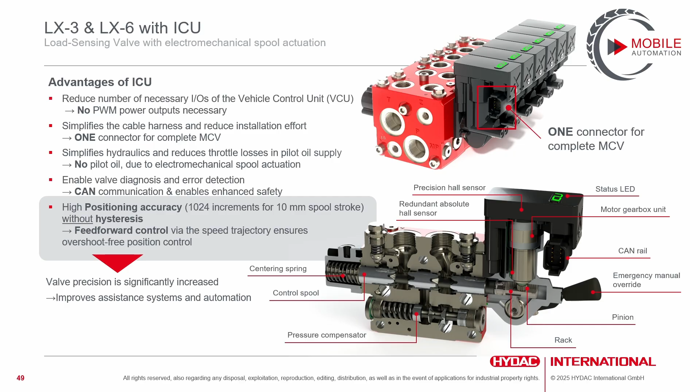But for mobile automation, most important is the high position accuracy due to the high number of increments over the spool stroke and the high position accuracy without hysteresis. That means we have a feed-forward control on our ICU, which enables us to have very high accuracy on the one hand, and on the other hand, very high dynamics of the spool actuation. This improves assistance systems and automation functions in your machine.

But last but not least, the eye of the machine. Sensors are the key to automation. Therefore, we have developed and tested our excavator sensors for inclination, linear position, angle, and pressure. Each sensor has its own advantages and disadvantages, for example in terms of installation, accuracy and dynamics and so on. It makes sense to consult our expert to select the right sensor for your specific application.

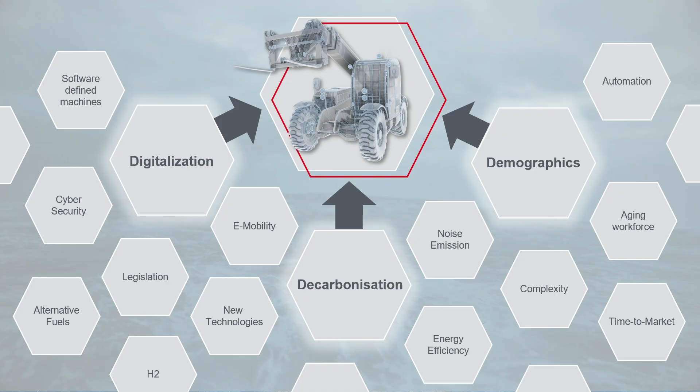Before we finish this webinar, I'd like to highlight the key takeaways from today. At the beginning of this webinar, I painted this dark picture of a mobile working machine surrounded by technological, environmental and social megatrends. Over the past 90 minutes, we have addressed many of these, far more than just efficiency, noise and complexity.

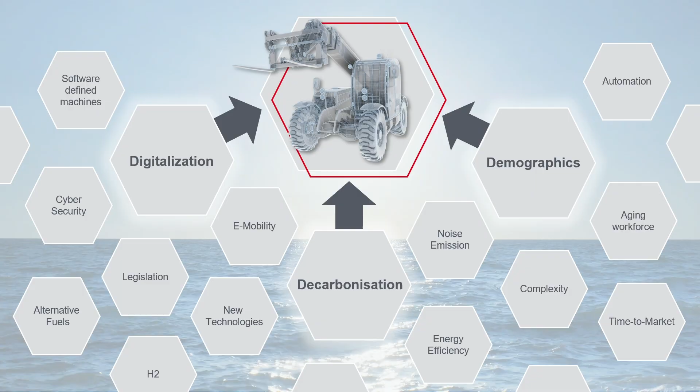Applying this approach to products, the HYDAC EcoPack Plus shows how you can increase the efficiency of your electrified machine through an optimized operating strategy, and reduce noise emission as another keyword as well.

I hope I have been able to give you an idea how HYDAC can help you with your transformation. If you are curious about how much energy your machine could save, or if you want to be part of developing the next generation of hydraulic systems, let's talk. Let's shape the future of hydraulics together.

At the webinar, we asked our customers 3 questions, and these are the results. We asked which topic related to modern hydraulic systems interests you the most, and 61% say they are interested in energy efficient solutions. The second question was, in which areas of hydraulics would you like to see more innovation? And most people say they want to see innovation in the functional level of your machine.

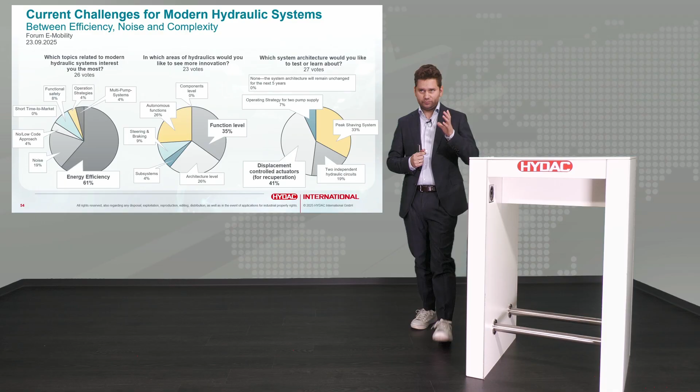And the third question was, which system architecture would you like to test or learn about? 41% want to learn or test a displacement controlled system to realize recuperation. Thank you to everybody who joined the survey, and I think these are very interesting results we can work on to increase the efficiency of your machine.